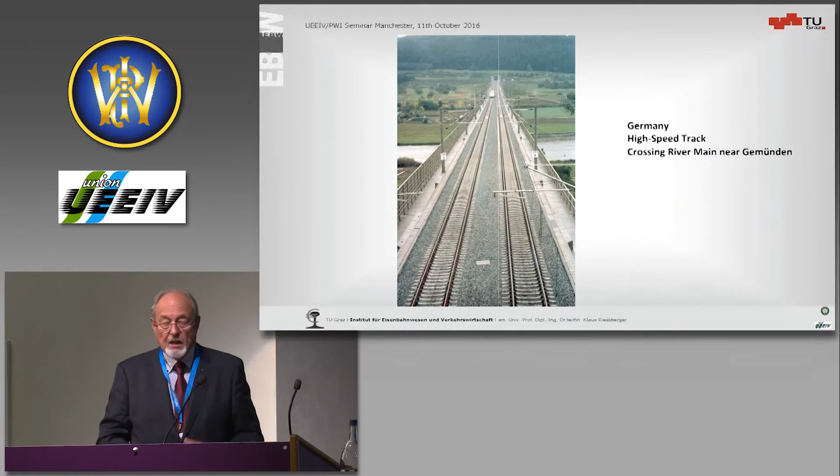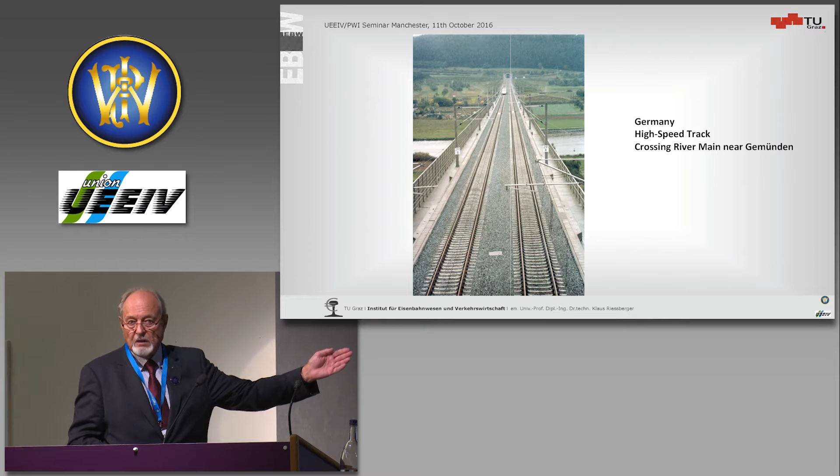So if we discuss modern track forms, we should also give some thoughts to ballasted track, because the tradition is so strong that, for instance, you have brand new high-speed lines in Germany made from ballasted track. They perform beautifully for 300 kilometers per hour. You see another section, it's pretty new, it's in Italy. And I tell you that the rails here are colored white, and I leave it with you to consider why.

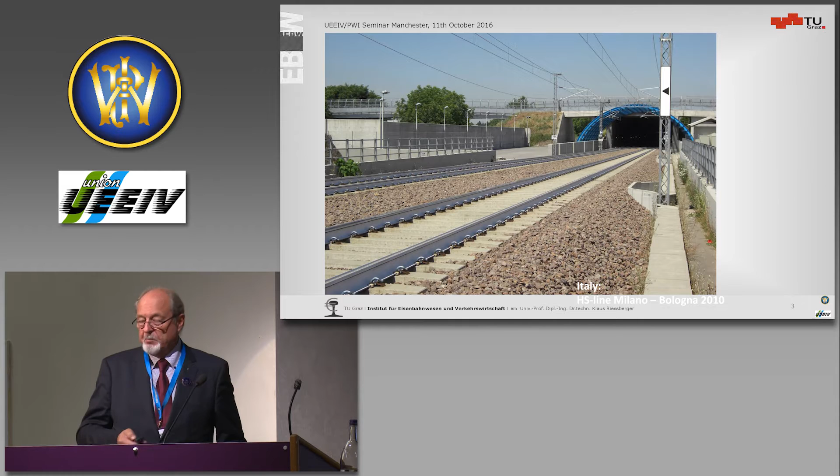So, but also it's traditional ballasted track. And this ballasted track is a wonder form, isn't it? Taking all the loads, all the speeds, all the strain, being such an old design. So it's high time to give more thoughts to the ballasted track, because there is no advocate for the ballasted track to underline the advantages it has.

So consider a track, consider two axle loads, for instance, and we are looking now to the pressure on the bottom of the sleeper, and it's the pressure on the ballast. You see it here, and that means where the maximum is, it is the maximum pressure. And the next is also supporting, less supporting, and again. This is fine and clear.

But what I want to point to you is that you have a highly loaded section under the sleeper and a non-loaded section in between. And the situation like this can only be balanced by shear stresses. So our ballast bed is full of shear stresses.

Ballast is not very good in taking shear stresses. So what comes out of this? We have high loads here, 12 newtons per square centimeter, yes, and so on. And if we now take a load like this, where we put together two sleepers, then all of a sudden the same consideration brings you to much reduced stresses under the sleeper itself.

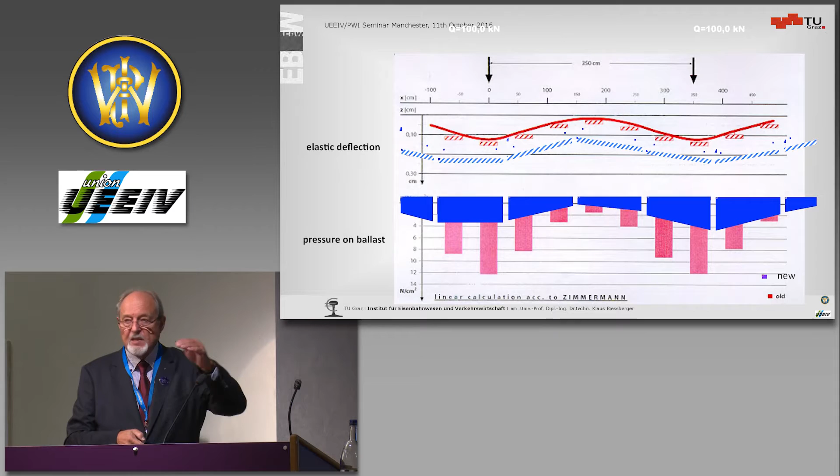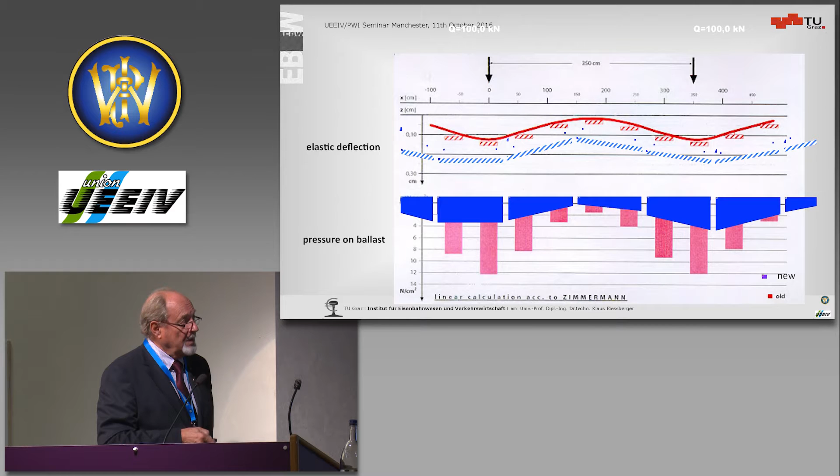But this is not the main issue. The main issue is that you have almost every particle in the ballast bed loaded continuously. And the load goes up and down, but you are not jumping from one sleeper to the other. And if you take this, then you can realize that by a longitudinal beam. And this longitudinal beam is here, for practical reasons, split into pieces.

Next thing to say, if we consider the load distribution from this level of ballast underneath the sleeper, how is the load and the pressure distributing into the subgrade? Well, if you look to the most modern books, you find an angle of 45 degrees. If you look to antique books from 1850, you find an angle of 45 degrees. Was it all the same?

As a matter of fact, this graph is known, of course, to everybody of you, and it gives a nice distribution of stresses on the subgrade. But we did some measurements, and Mr. Marschnig is amongst us, he did it actually, and I took the slide out. Stefan, forgive me. Where he is measuring this with an array of load plates.

And what did we see? This is the angle I was talking about. This is the pressure distribution. And in reality, we found an angle of 17 degrees. And that's a hell of a difference, from 45 to 17 degrees.

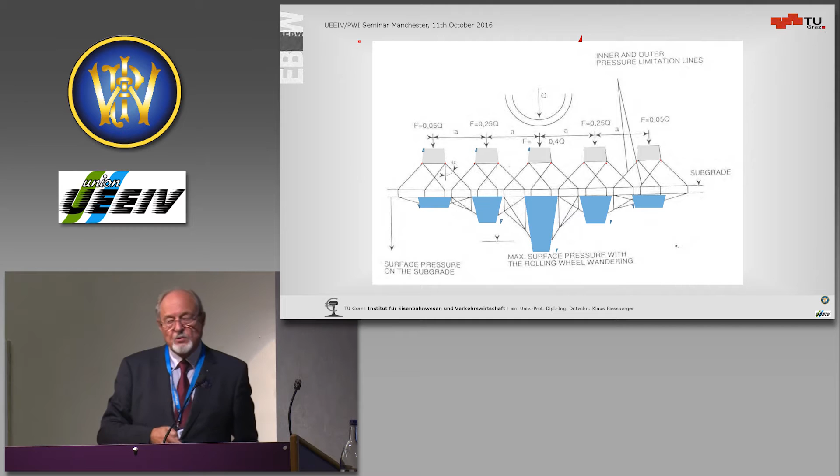And if we draw the same picture now, then you see how the load is distributed on the subgrade. And again, it's jumping from one loaded section to the other loaded section, unloaded, loaded, unloaded, loaded. Again, shear stresses are in the subgrade. And you know the answer of the subgrade, at least if it's rainy and it comes up.

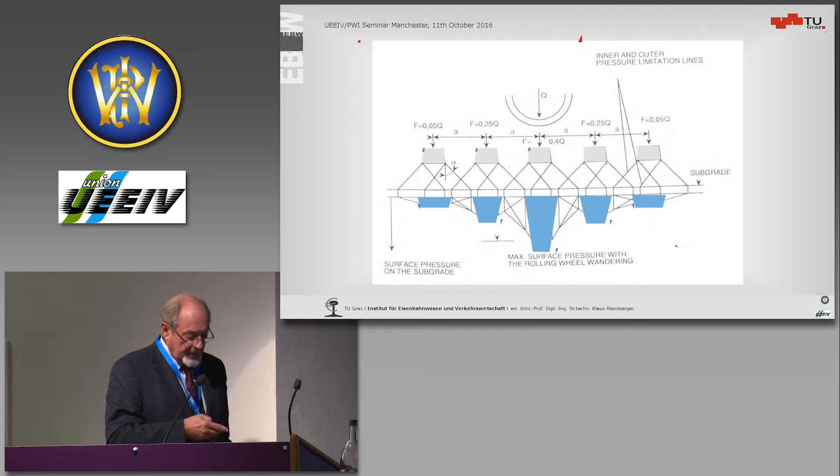So, something is not really understood in our traditional track. And to make a long story short, this is our traditional cross sleeper track as it exists for 180 years, or maybe 170 years. This is what is the combination of a cross sleeper and a longitudinal sleeper, but of course this is practically not to realize, because we should have an infinite long longitudinal beam.

So what we did is to cut it into pieces. You see, this is a frame, this is a frame. So we call that the frame track number 1, version number 1.

And this, very much to my surprise, is not a brand new idea. Also, in 1854, the famous track engineer Carl Ghega, who built the Semmering line, had on his line this type of track, a combination of a cross sleeper and a longitudinal beam. I bet this would have been the standard track of today if they had the timber treatment already invented. In those days, after 3 years, this timber construction was gone, because timber treatment only started from 1863.

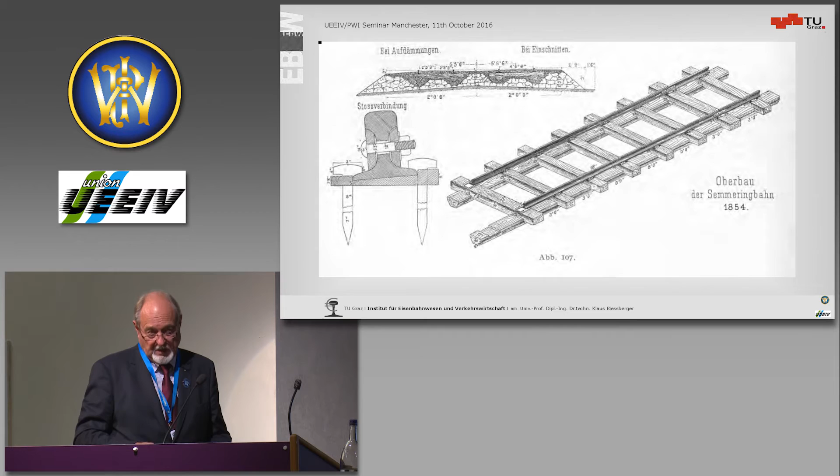Yeah, and I am very much aware, and it's why I say it here, because I was ever so impressed by the high water tables you suffer from here in England, on the island. I remember an approach to Heathrow one day, many years back, in the evening sun, and it was glittering from all sides, water all over the place. And then I saw tracks where the water was almost at the crown of the rail. So take it seriously. The conditions you have here are difficult, and you are aware as soon as you build a tunnel or drill under London.

One issue which, from my point of view, is not taken seriously by many track engineers is the interface between the ballast and the concrete sleeper. If you have a hard concrete sleeper on hard ballast, you have a very reduced contact area. Actually, it's not more than 3 to maximum 5% of the total, as we calculate. It is like a fakir sitting on his nail bed. This is railways, proven technology.

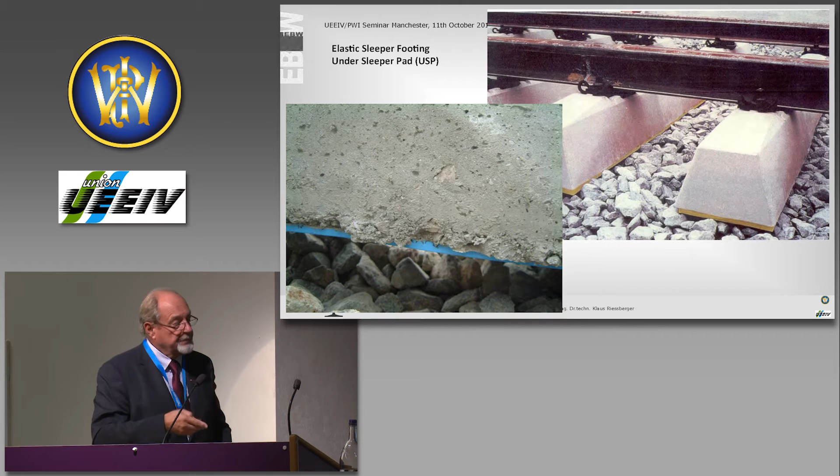So this is another section down in Carinthia where we have a line where we can go 160. Unfortunately, Austrian Railways is a very alpine railway, and there are not many sections where you can go speeds of this magnitude.

Also with this old design, one frame here, one frame here, one frame here, and so on. And of course, it is very important in our case that we also have these lines in the sharp curves.

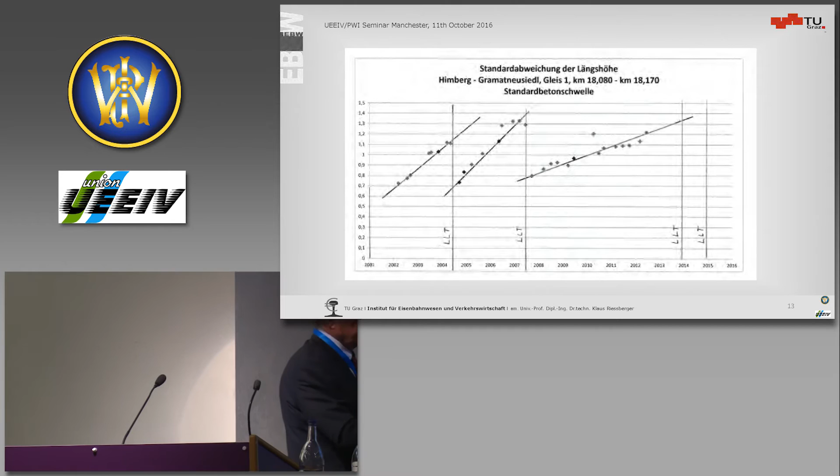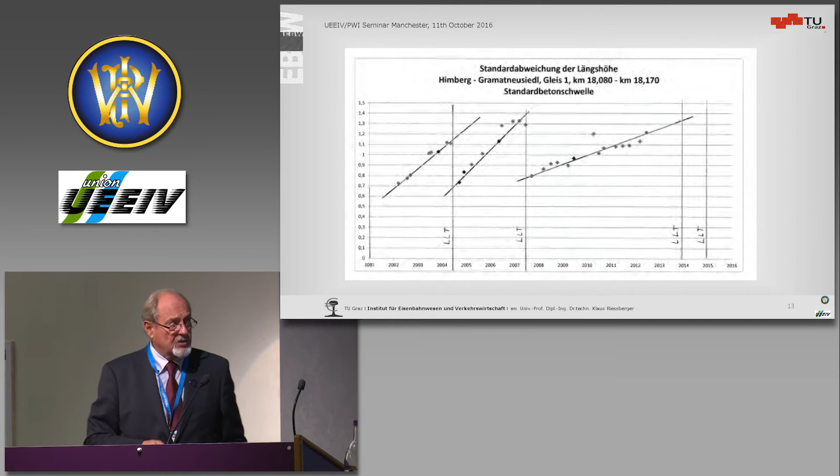Now, how does the longitudinal level develop? The traditional track, which you saw first in Gramatneusiedl, here you have the number of the years. So this is 2000, 2001, and this is 2015, and you see this is tamping interventions. Very roughly, it goes up from a standard deviation of 0.6 millimeter to 1.1, from 0.7 to 1.3, from 0.8 to 1.3, so that the trackmaster decides to have a tamping machine run.

If you take now the track, which is the same, on the same track, a section before, then you see the results here, again from 2001 to 2016, and you see how it goes, from 0.7, which was also the figure we saw before, but remember, we have been at 1.3, and here we are at 0.91. So the durability of the geometry is much, much better.

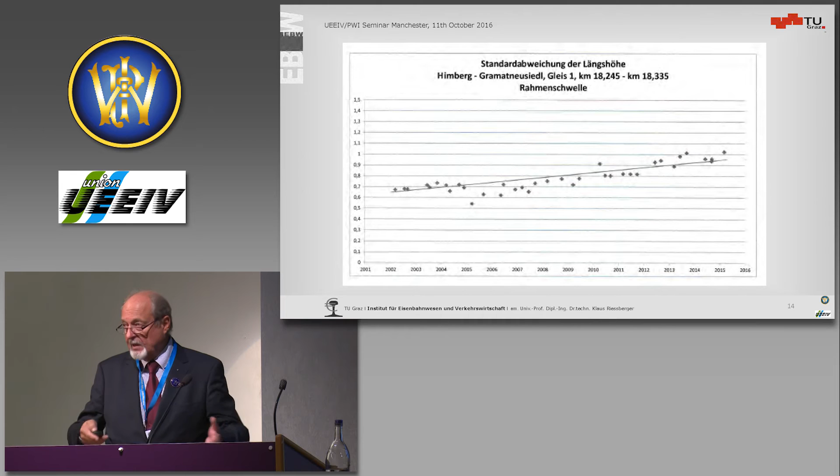Well, in the first instance, when we did the first economic calculations, we thought we would double the tamping interventions. Today we must say we will have a much longer time until the track needs tamping again. And so, as we have about 7 test sections throughout Austria, in not one has tamping been done after laying the track, in no one.

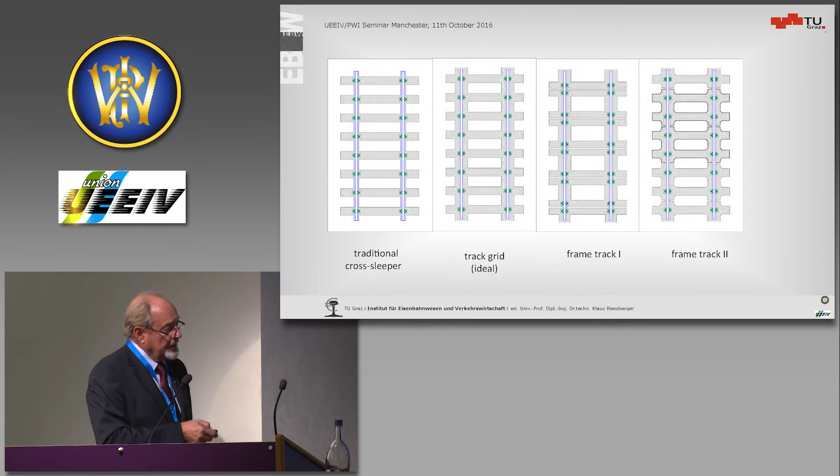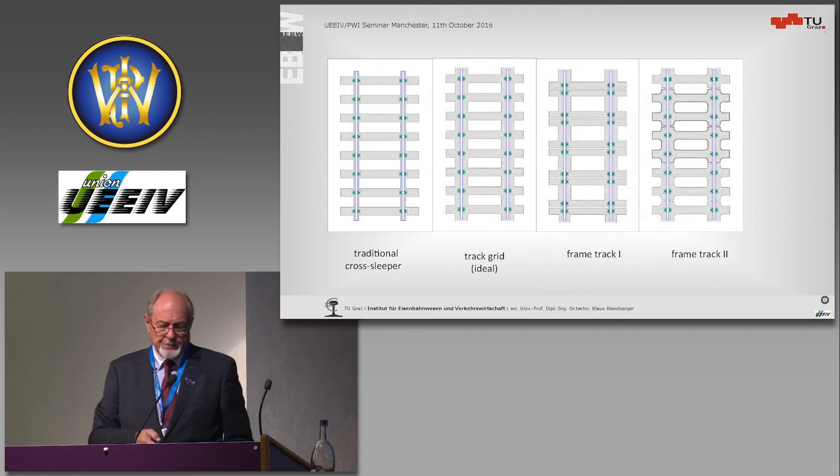Now, this was our full frame here. But as I said, we had some problems with the reinforcement. And then the next issue was that we found the tampers did not realize that the rhythm changed, so we had some hits on the very first cross sleepers or frames. So we discussed and came back to the idea of having it with a regular spacing of 60 centimeters or 600 millimeters. But again, it's a frame, as you see here.

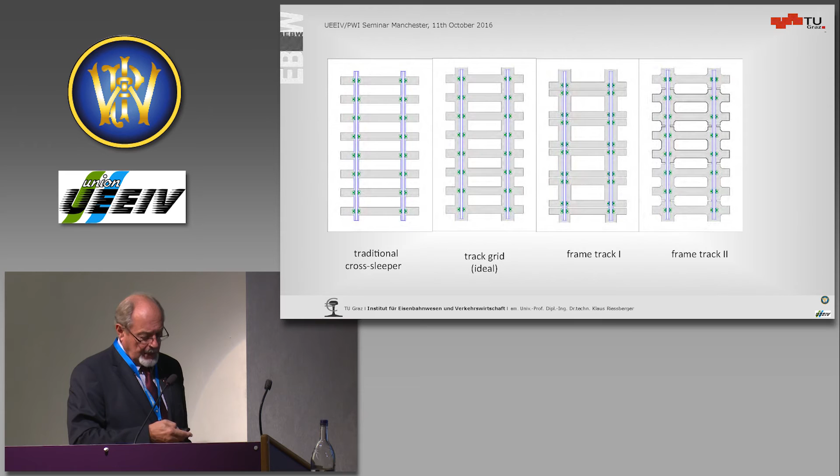This used to be the old one, also in a mode where we have straight reinforcements. Of course, the production was very expensive because you have perpendicular pre-stressing. So I had to accept that it is too expensive and we have to forget it.

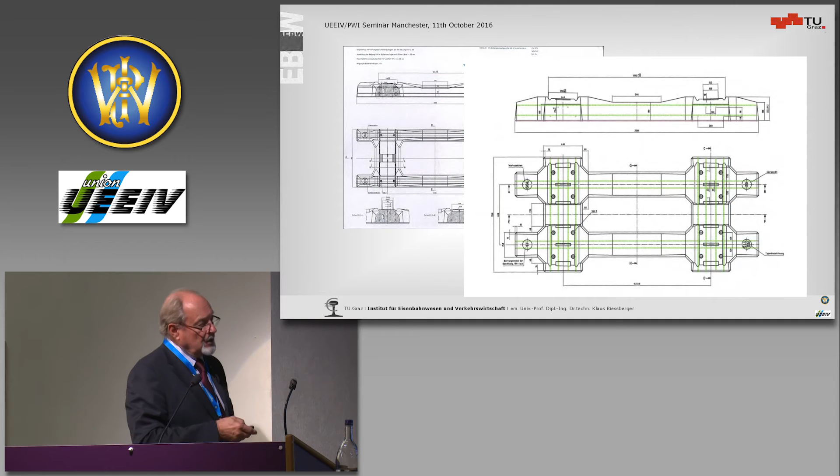And so we came up with the next idea, but it's also perpendicularly pre-stressed. And of course, it's of a much sturdier design, because there was interest from the Americans to use it for 35 metric ton axle load. And so we developed this, and we had it on the main line.

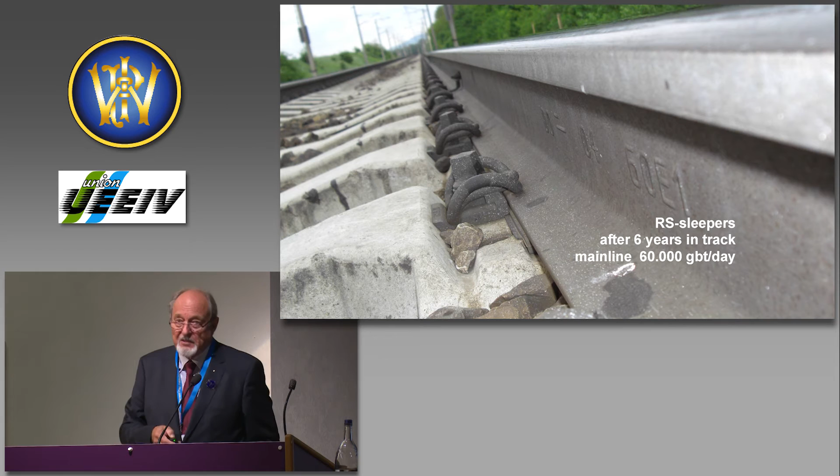Of course, we always make tests only on the main line, you know. This is the main line approaching Vienna, and you see very clearly the frame here. You see there, two fasteners are connected, and you see, of course, also the elastic pad underneath. This was done after 6 years in track on a main line with 60,000 tons per day, and you see it's absolutely straight, and where the bumps start, that's the end of the test section.

And then we had to transport the Austrian-made cross sleepers of this type to the US. And there the problem of transportation under economic conditions came up. And under the impression of what can we do, it was decided, also with an eye to production, to split this track here once more.

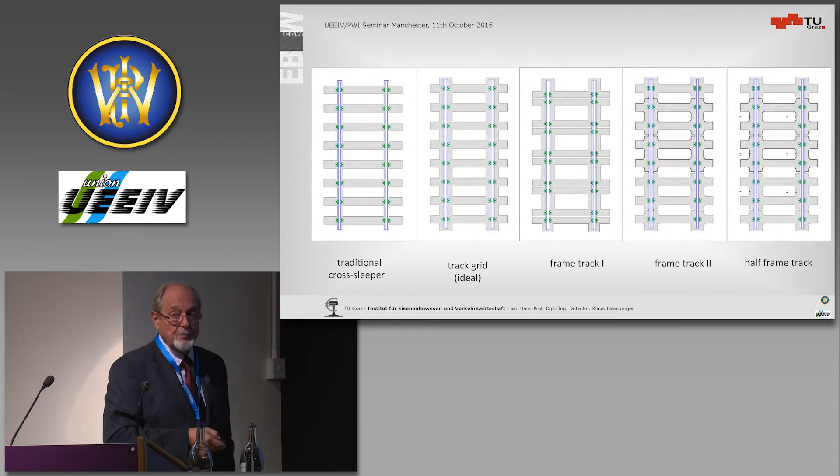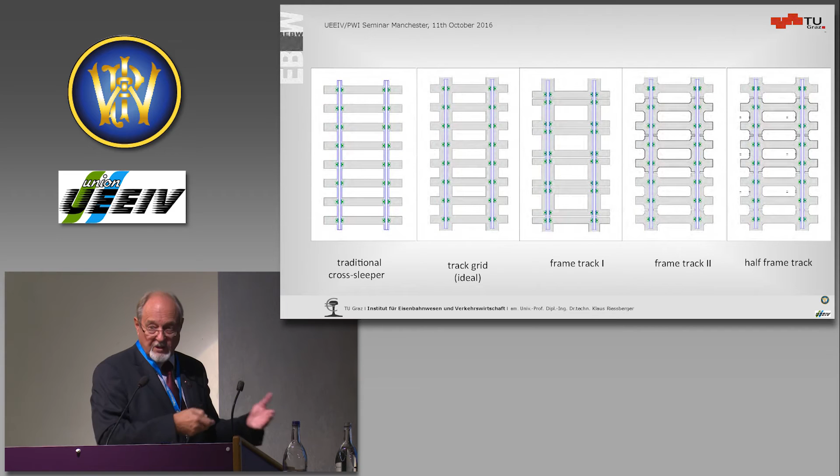And you see here it's individual sleepers maintaining the longitudinal beam, which is now made of short distances, like the chain of a tank. And this is also how the load goes over it. It's not like a sheep's foot roller, which would be a traditional track, jumping from one to the other. It is now the chain of a tank.

And this is taken now in the States, in Pueblo, Colorado, where also some full frames were brought to. But of course, the majority of the material in the test track is of this type. It's the half frame tie, HFT, named by the Americans like this.

We say HDS, high duty sleeper. And out of this construction, we built the track in the heavy axle load loop, where they have a continuously revolving train, a rotating, unmanned train. Automatically it runs down and produces nothing else than load.

But you see one thing more: there are 3 dowels in the fastening, and this is an idea of Rudi Schilder, who is here. You see, we can put 2 clips here, but you can also double the clips. So you have double clipped, double clipped, double clipped, double clipped. You get a sturdy construction, and simply by the stiffness of the structure, even without ballasting, you are very safe against buckling.

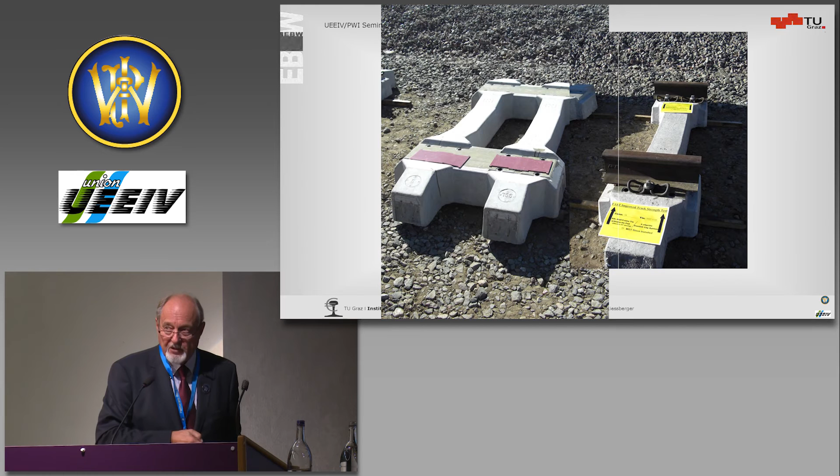So we used this assembly to fasten twice on the inside of the rail and to fasten 1 clip only on the outside of the rail, which performs again beautifully.

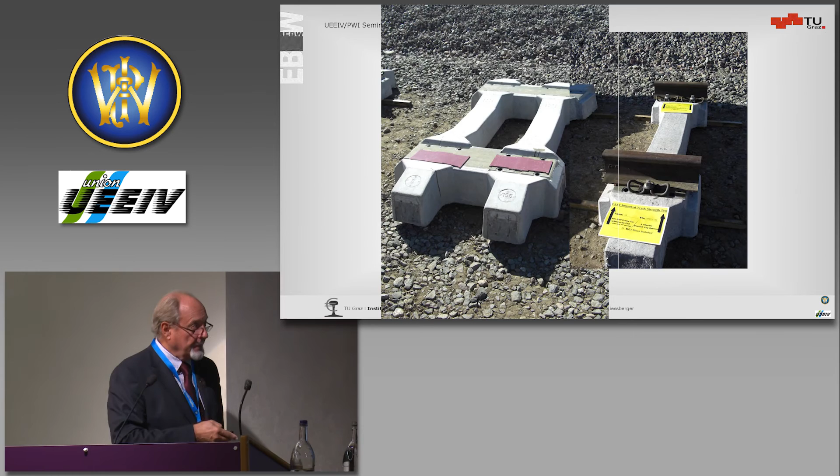And I give you some shots of this test section in the desert. The greatest danger here is not the approaching train, it's the rattlesnake.

Yes, that's it. And you can see here the double fastener, also here the double fastener.

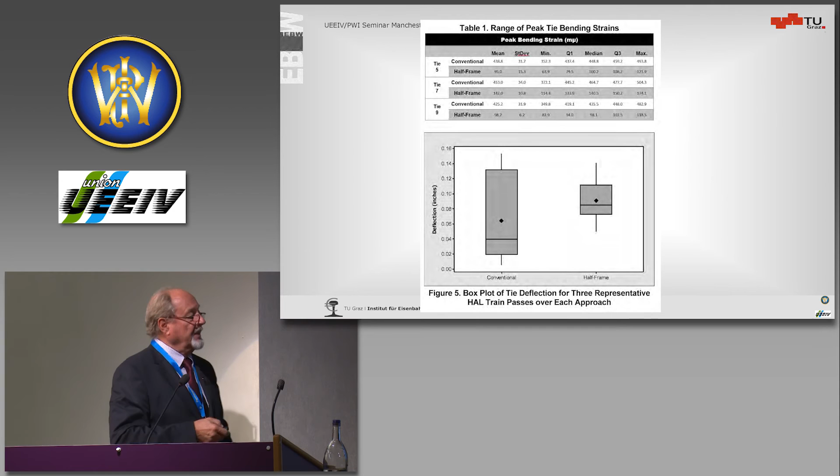And the Americans also made some more tests, and they publish reports on that, and they have an annual display of results.

And this is now the bending stresses in the sleepers. You see that the bending stress on the conventional has a mean here, and then you have these box diagrams. But the stresses in the frame or half-frame ties, half-frame sleepers, it's much more continuous, as you can clearly see here.

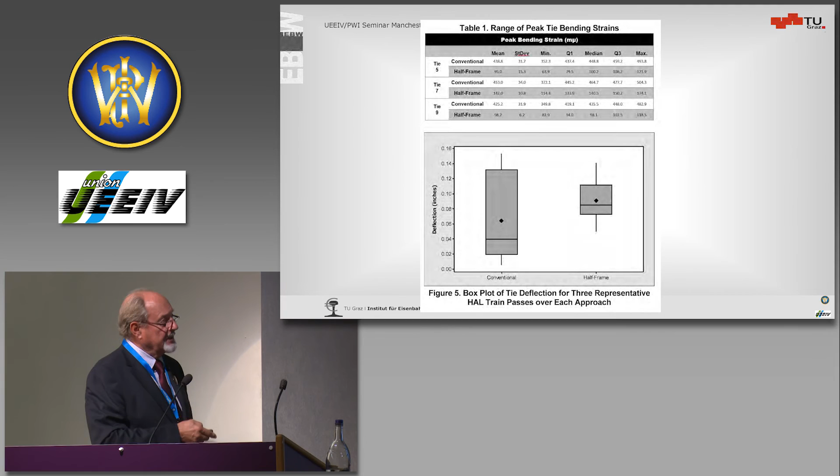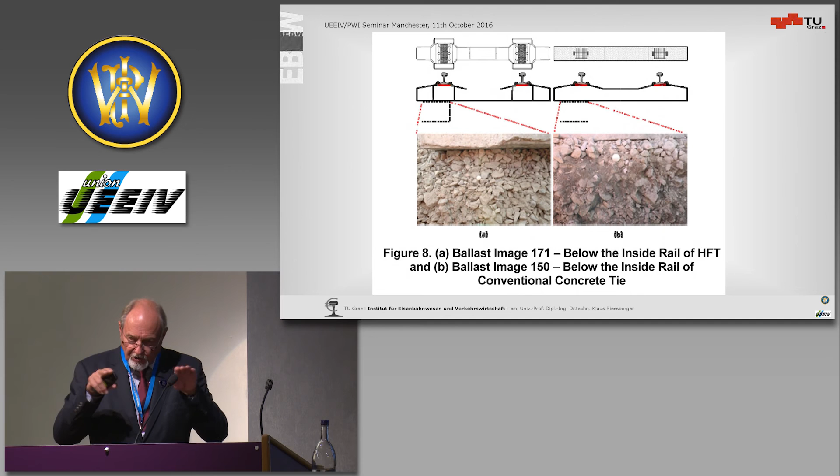What we did not discuss, but all of a sudden we had it in the papers: they measured the ballast deterioration. You know, ballast breaks into pieces under the loads, etc. So over the years, you have an ongoing destruction of ballast, which has also to do with the unevennesses. I said in the first sentences that we do not have a continuous load, but we have a theoretical peak to infinite at the edges, and there you always have destruction of ballast.

You can go to any track in the world and dig in at the end of the sleeper. If you go as deep, you are in the dust, you are in the smashed ballast particles. And it's the same here.

You see here, this is a conventional sleeper, and this is about the section. You see the material here. And if you take this, please think of the frame sleepers. This is the longitudinal beam. You see, it's almost no destruction.

This definitely will reflect on the lifetime of ballast. Because today we said with ballast we have 45, 50 years, and then you have to exchange the ballast. So if that is the case, you have to think how you can design a sleeper to extend the life of the ballast. No doubt the ballast is the weakest part of the design, and so we have to take everything to protect it.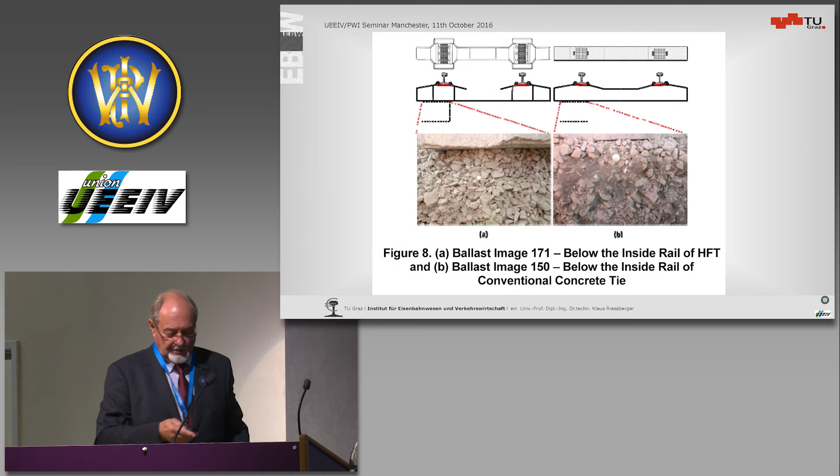So, here you see this indication. This is perfect, it's about 40. That's an experimental quotation or note given between 40 and 80. 40 is excellent and new ballast, and 80 is, well, to dump it. And you see, you can say this sleeper is about here, this sleeper is about here. Of course, it's the same tonnage upon it.

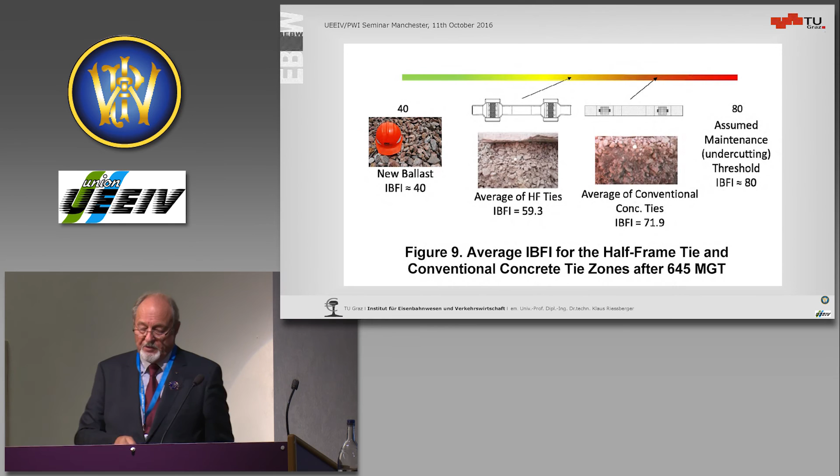And for the first test section in the States, they tried a very sharp curve in the Rocky Mountains at Union Pacific. It is laid here and it performs excellently. They wouldn't have believed that it is possible to improve a track to this standard.

And of course, I have no pictures here, but we have also made bridge approaches in Austria and in the States. I think in the morning somebody said, you always have a bridge, a bump and a bump. So we inserted a certain number, 10 or 12 frames in front of the bridge to overcome this weak point, and this works beautifully.

Now, if that is in principle a ballasted track, then especially if you think of high speed - we have no tests done so far with high speed, I must admit - you have the flying ballast problem.

One issue is too much ballast, and that the ballast is not compacted. The worst thing is having so much ballast that it sits on top of the sleeper. As the train approaches, the ballast particle starts jumping, and then the wind flow takes it away and puts it somewhere, damaging and injuring or whatsoever.

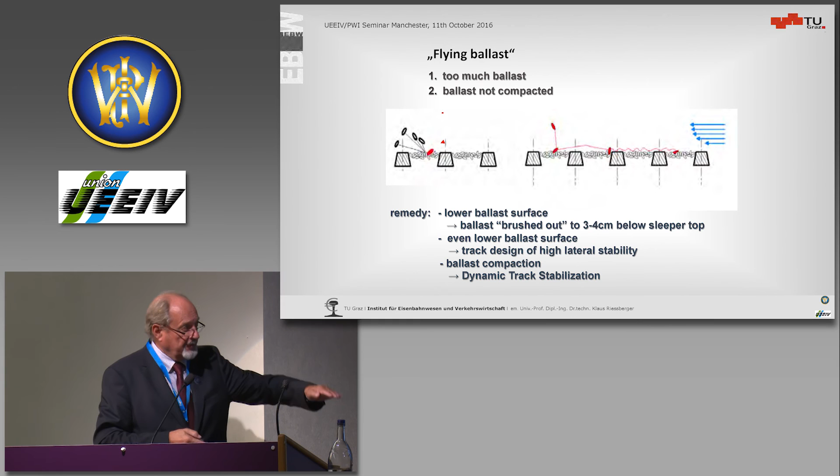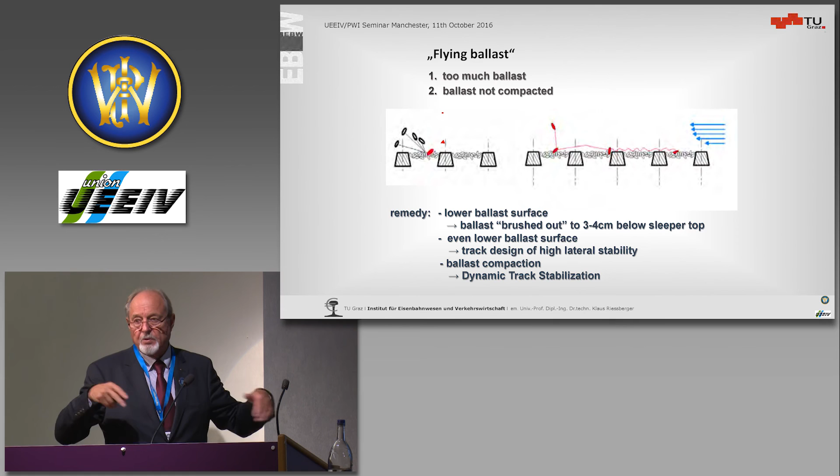So if you not only put your ballast surface down to 3-4 centimeters below sleeper top, you should also get rid of the ballast on top. You can simply put it down with a brush or other machines.

Now, the question was always, can we have it mechanically produced or maintained? Yes, we can, in principle, with a standard tamping machine, but as you see here, there's a certain width where no tool can enter.

So the first solution is to use a switch tamper. In a switch tamper, you can displace the tamping banks and penetrate to do the tamping. Number two, as the two tamping banks are moved sideways, we need some component to press ballast to the crossing point.

One of our experiments was a rotated tool, 54 degrees rotated, which is easily done. You need a second groove. We did it, and now I'm looking forward to it, and I hope it works.

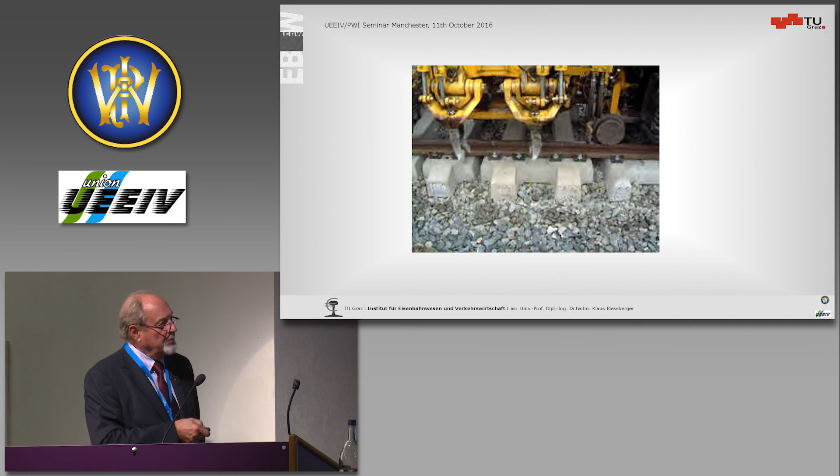You see, the test setup was here, with different types of sleepers - type number 1, type number 2, and so on. We did it in one run, and you see the result. This was the position of the sleepers, this was the position of the rails, and you see how nicely tamped the whole thing is after one tamping run.

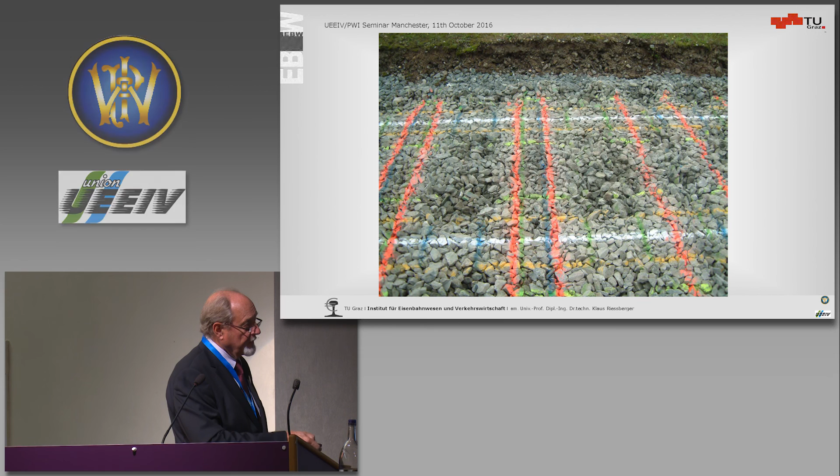So we can, in fact, also under-tamp this sleeper with a modified design.

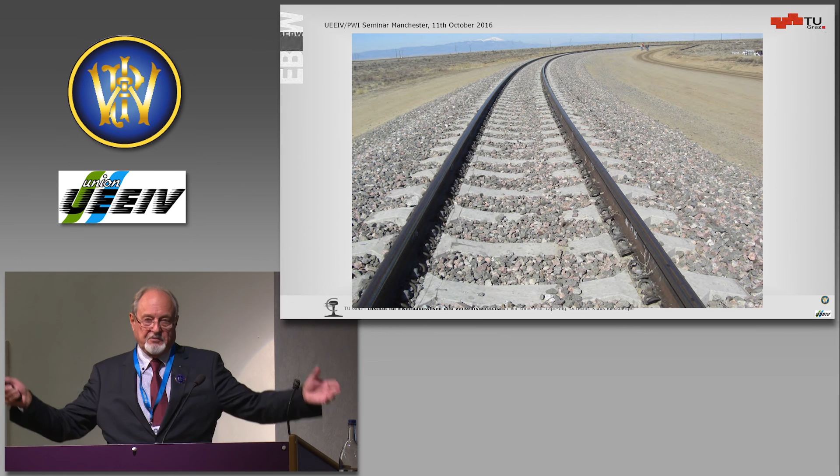This is one more picture of Pueblo. We are now discussing concluding this test because the experts say we wouldn't learn anything more. That's the big difference between track and, say, a new motorcycle - a new motorcycle you can test out and it's beautiful, but in track you have to wait 20 years until you get results.

These heavy-duty sleepers are in regular use at Austrian Railways since last year on various sensitive sections, on the Semmering line. I have a pamphlet here from the production company showing one of these sections, where you can find old friends - the cross sleepers and the double fasteners. I have a set of such pamphlets with me, and I'm unable to decide who gets it.

So I will give it to Niall, and it's your responsibility.